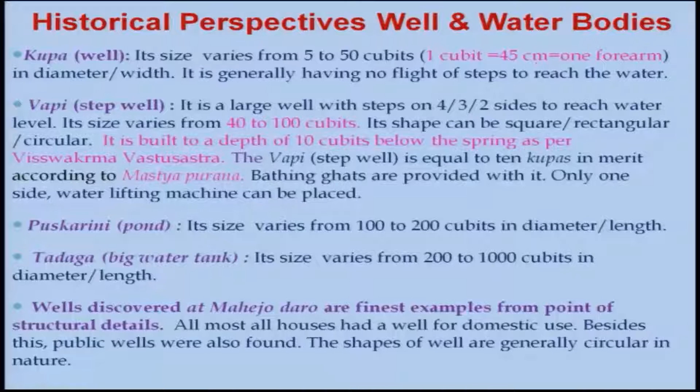Keep in mind that generally the shapes of wells are circular in nature, but if it is a big one, like a Vapi or some other structure, step wells will sometimes also be rectangular.

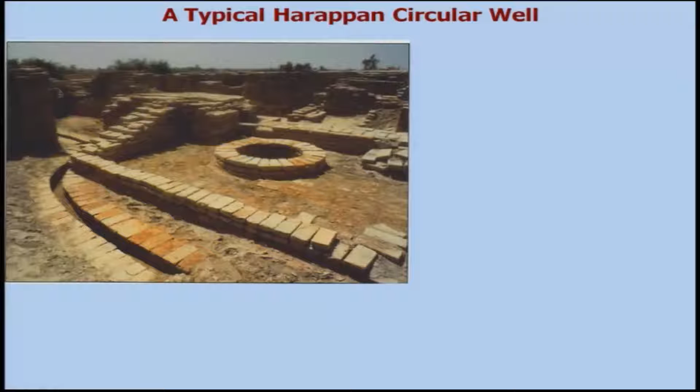So let us look at a typical Harappan circular well. If you look at this figure, this is the well, and these are all bricks — trapezoidal in nature — which are used to prevent inward collapse. Now, suppose I want to replicate this kind of well, I cannot, because where will I get trapezoidal bricks made for me?

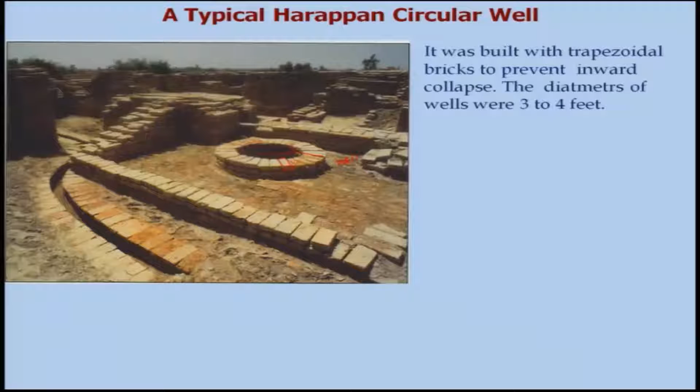At that time, people were making their own brick kilns. They had their own kiln, and they could design and make the bricks themselves. Today it is not possible. Of course, when I was a kid, I had gone to a village, and I remember a person trying to make a house who was also making a kiln for baking the bricks to be used in his house.

The diameter of wells is around 3 to 4 feet. As I told earlier, these wedge-shaped or trapezoidal bricks are molded and burnt properly, and the wider bricks are carefully curved. This curving is very essential to have a smooth surface, and generally mud mortar was used to bind these bricks.

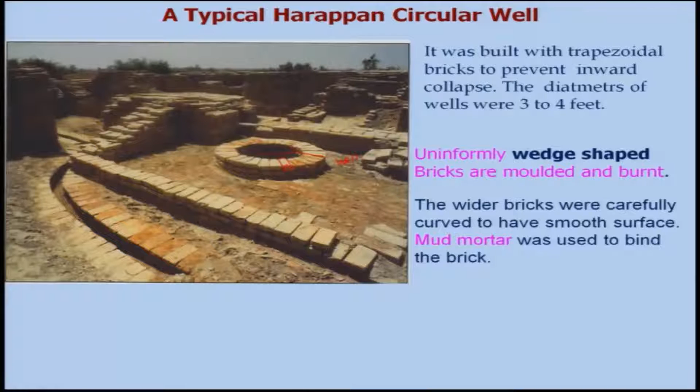Keep in mind that this is the ground where pavements of brick are being laid. These are the brick pavements and the well, which has a slope, because this is the drain. There is also another drain here, drainage systems, and at one corner it will be coming and then passing through to this place.

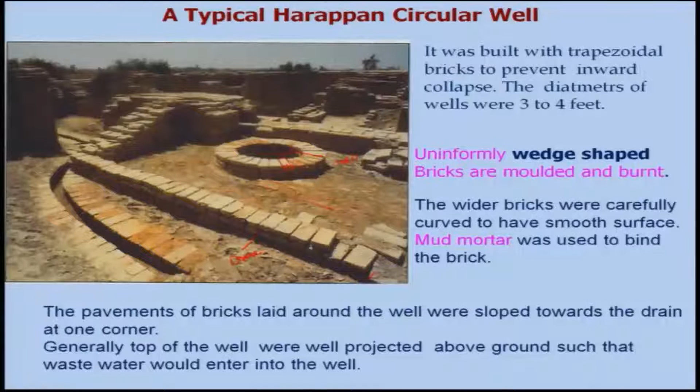Beside this, if you look at the top of the well, it was projected above the ground level so that waste water will not enter into the well. So, if it is well designed, it is not that people have just done it randomly, this is a well designed kind of thing.

There is a lot of other land where water will be available, and they would store it from the rain also, in the form of tanks and ponds.

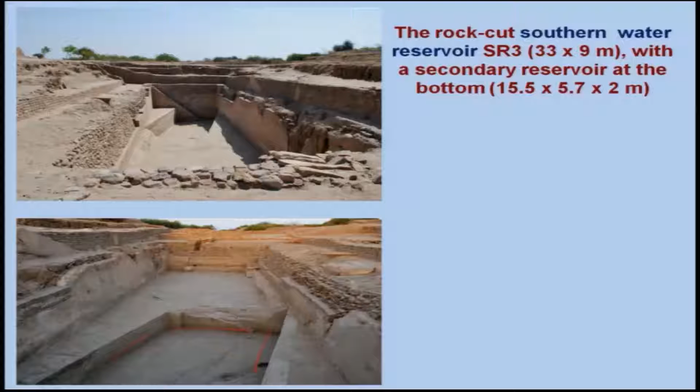This is part of some other reservoir, like rock-cut southern water reservoir SR3, which is 33 by 9 meters - length 33 and width around 9 meters - with a secondary reservoir at the bottom. There is another reservoir here, which is a step, and then reservoirs of 15.5 by 5.7 by 2 meters, kind of things that people have excavated.

Archaeologists found 3 massive reservoirs, used for storing fresh water brought by the rains, and to store water diverted from the 2 nearby rivulets I had discussed. That means they were using rainwater for storage, and also taking water from the rivulets or small rivers to store them.

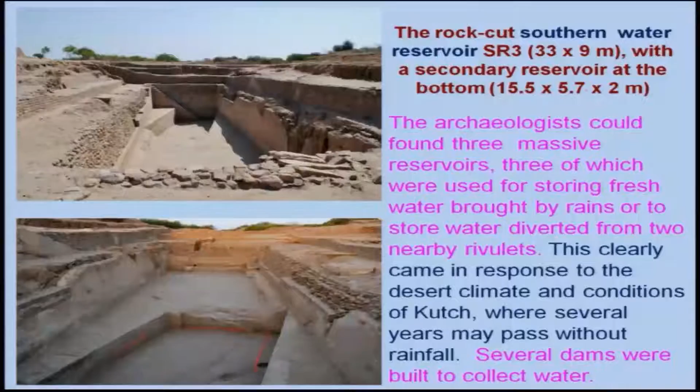This clearly indicates that proper management of water harvesting is essential to have a good life even in the desert climate condition of Kutch, where several years may pass without any rainfall. So several dams were built to collect and preserve water. That means at that time people were having concern, they had design, and they were doing it properly and using it - why not today? We will have to not only preserve it, but also use it sparingly, that is important.

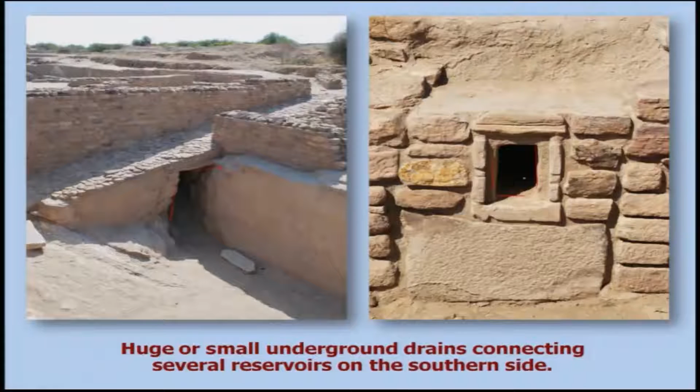Huge or small underground drains connecting several reservoirs on the southern side, one can see. That means it is not the reservoir alone, they are connected through that. If one reservoir has water, you can take water from another and use it. So suppose there is a flood on one side, what will happen? The other side, which is not having water, the water will go to that place and be stored there. So that interconnectivity was also there during that time.

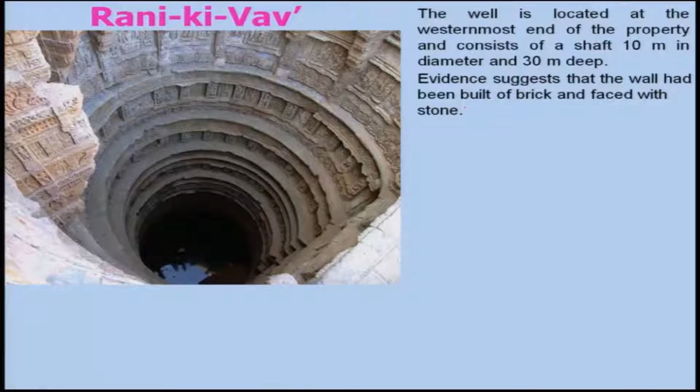Lots of sculptures are there, and evidence suggests the walls had been built out of brick but faced with stone—meaning the brick was cladded with stone. How could they have done that? That's one question coming to my mind, because the stone and brick had to be joined together, and that technology has to be unraveled.

From this wall, vertical brackets project in pairs, supporting the different galleries of the well shaft. The bracketing is arranged in tiers and is richly carved—if you look at it, these are the carving points.

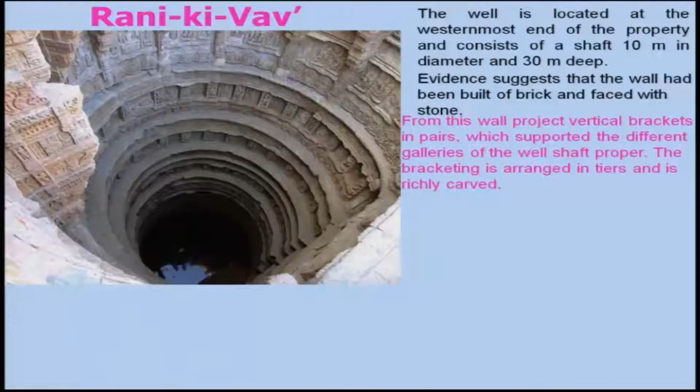So, these are the carved structures you can see in the wall. If you go to this small region, you will find several statues and a lot of fine work on the stones. Therefore, one can say very clearly that Rani Ki Vav is the queen among the step wells of India. But till now, such a decorated, intricately designed and sculptured well we have not found elsewhere.

Of course, it is done elsewhere, but not that extensively. Therefore, that is being considered.

There is a small gate below the last step of the step well, leading to a tunnel of 30 kilometers, by which the king might escape whenever there was a fear to his life due to invasion or something, and which leads to the town of Sidhpur near Patan. Now, if you think about that 30 kilometer tunnel, how did they build it?

And now we need to also build similar tunnels, because a lot of our Indian cities are not having a sewage system where people are living. Now, you want to put a tunnel through which you can pass the sewage system. How will we do it?

One can learn from that, and keep in mind that now, of course, this gate is being closed down because people may misuse it, and that is the marvel of the technology at that time, how people built it. Step wells are a distinctive form of subterranean water resource and storage system on the Indian subcontinent, and this construction has been going on since Harappan times. It is not that these people started it, they just marveled at the things.

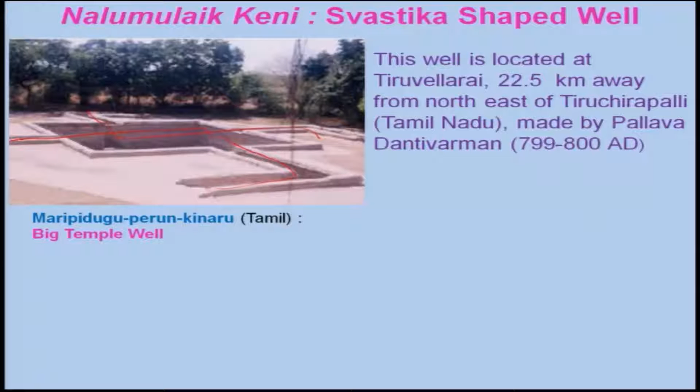This is also known as Mari Pidugu Perun Kinaru in Tamil, a big temple well. It is located near a temple, and its size is around 37 square feet. It might have been used for the temple and irrigation of Devadana lands, because in earlier days temples also had certain lands.

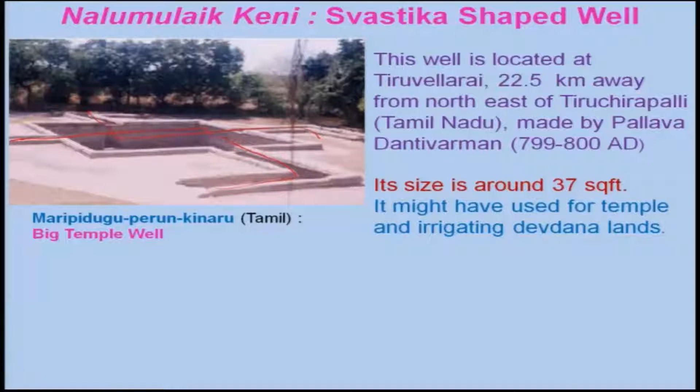And these are the steps, where people can enter and take a bath. I do not know really, but there is also some support system there for how they brought the water, maybe water was coming here and then they would use it.

As I told you, there are 4 entrances here, one here, one entrance here, another entrance somewhere here, another here, and this side is also one entrance. So, the inner face of each portal and the outer walls and margins are made of dressed granite stones.

So, people had great concern and used a lot of technology at that time, whichever was available, and they tried to make these things.

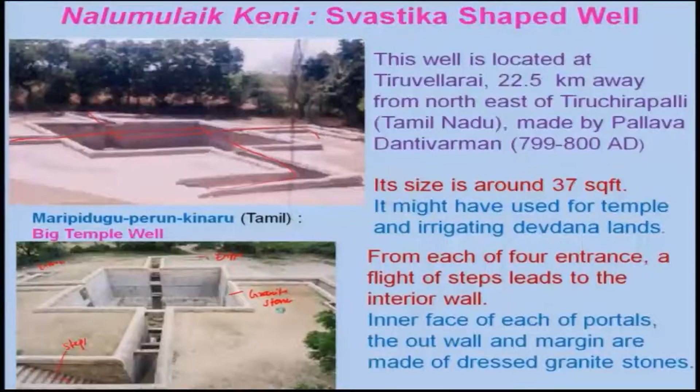And if you look at it, there are a lot of water tanks in the temple, and the water from the temple tanks serves the vital purpose of recharging the underground aquifer, reducing runoff, enhancing water stagnation time, thus ensuring sufficient water in the domestic well during the summer months.

So, this is one of the tanks I have shown, which is connected with a temple in the south, and I will also talk a little bit about temple water tanks in the next lecture. So, I will stop here, because the temple is a very important part of our culture, and therefore you can see the water harvesting there. Thank you very much.